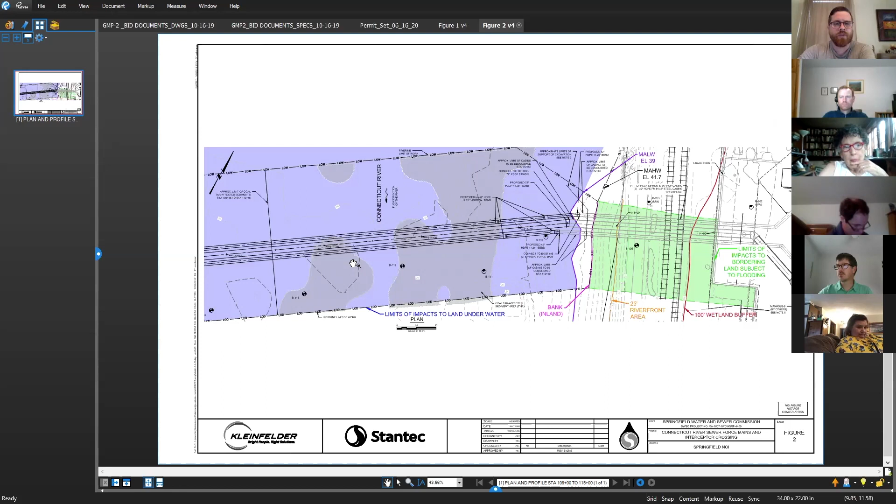So you're controlling sediment, and maybe a little bit more about that exclusion zone. I don't know if you have those figures. I'd just like a brief overview of that.

Absolutely, I'll flip back to this figure here. Apologies while this loads, it takes a little bit. Generally what's shown here—I have a whole other set of plans submitted with the NOI, they take longer to load electronically, but let me describe it. Generally, the sturgeon exclusion barrier extends to the north at a 45-degree angle to the flow, encompassing the area immediately upstream of the limit of work, so not much happens here. This is generally described as a turbidity curtain, with an opening size small enough to exclude all life stages of sturgeon and prevent their entrapment. That gets closed off, and there's a secondary turbidity curtain encompassing the entire work zone at the limit of work and downstream limit of disturbance line. That turbidity curtain will control turbidity, and within that there will be bubble curtains to control noise.

Does that address your question, Kevin, or do you want to get into the piles and other infrastructure supporting those curtains? Nope, I think I just wanted it on the record that we discussed those measures that are in place and planned for us.

Thank you. Absolutely, so there is some temporary infrastructure that needs to be put in place to support those curtains, but that is again temporary—it'll be put in place while required and removed after that portion of the work is complete.

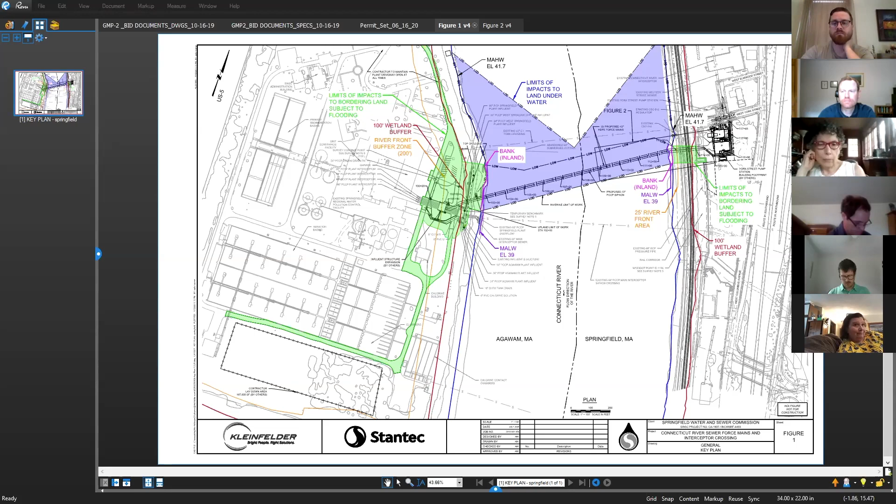If there are no other questions from the commission, I would entertain a motion to continue at the applicant's request to continue this public hearing for a minimum of 2 weeks to allow for public input, and perhaps longer for time to receive the other required permits.

And that's not my phone. Does somebody want to make that motion? I'll make a motion to continue the request for at least 2 weeks or until we receive the proper permitting. I second that. Thank you.

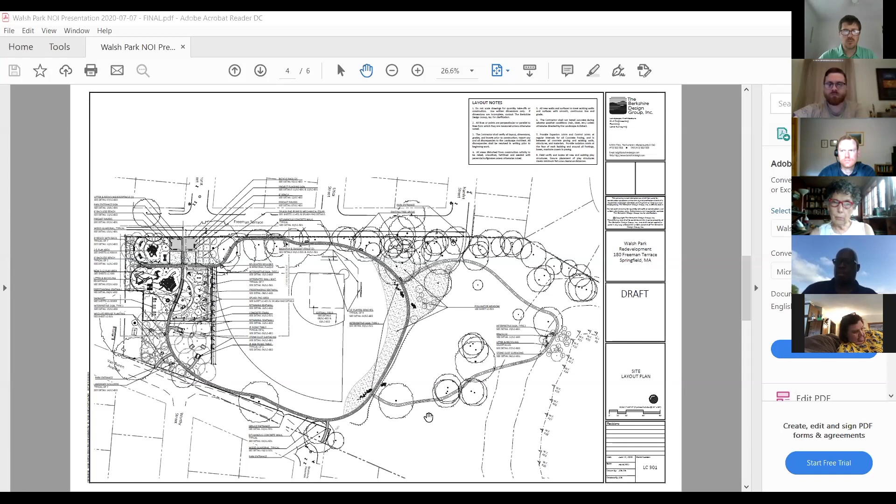And again, this southern portion of the trail is an existing trail that we're just going to improve with stone dust to make it more accessible and inviting to the public.

This is a blown up view of where that bench location is proposed. We've got some silt fence proposed at the top of the bank. This trail is existing up until where the hatched area begins, and then it's going to be a trail of similar material, just weaving its way through the trees and grade there with minimal disturbance.

And we've got some plantings, some landscape plantings being proposed as part of the interpretive signage there. Pussy willows, some other floodplain species. I think we've got a plane tree, a couple other species appropriate for floodplains, providing that opportunity for interpretive signage.

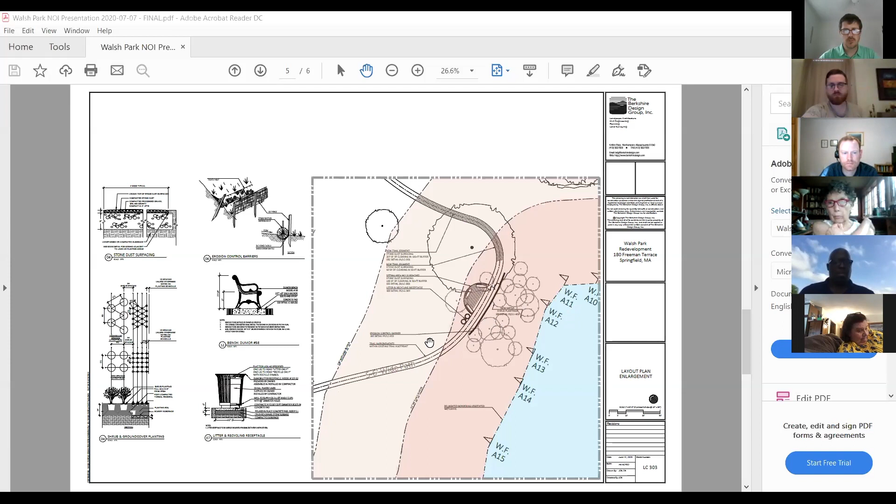It's a lot of invasive species. There's a lot of bittersweet. The forest is mostly cottonwoods. There's a number of stands of burning bush and some other invasives. So we're going to try to clean up what we can as we improve the trail, but it's really going to be about trying to minimize the disturbance through the woodland and create a different experience from the park, which is largely going to be an open field with playground structures and whatnot to the west and further away. But this was a nice way to bring in some of those elements to the larger park.

So I'd be happy to answer any questions. I don't think there's a lot proposed, but certainly appreciate you entertaining this application.

So do commission members have any questions? Now, I heard you say you're going to use stone dust. So is that basically making it pretty much handicapped accessible where it's pretty rough out there? That's the goal, is to make it handicap accessible. And how long is that trail?

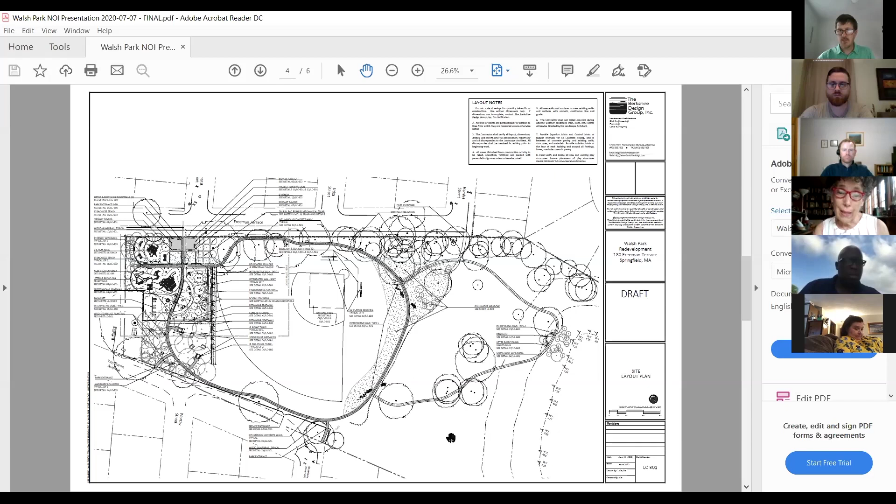Are you familiar with Regreen Springfield? I'm familiar with the name. They're working right now, and they've just gotten some grants. They're working to eradicate the knotweed through injections into the knotweed itself, which can be done in August and September. You said the report said there's quite a bit of knotweed in that area. There is quite a bit, especially at this woodland edge.

By cutting it now would be like not a good time to do it, because it'll grow even faster. But you could get in contact with them, because they're working on eradicating it in a lot of the parks in Springfield.

That's great, that's a great resource. Thank you. Do you know Dave Bloniarz? I do not. Okay, well the park department can get you his number, I'm sure. They're doing it, and he may even help absorb that into his project. But if not, he can certainly give you guidance on how to get the right material to do exactly what Juanita is speaking about. Great.

Are there any other questions from the commission? Hearing none, I would ask for a motion to continue this at the request of the applicant for a minimum of 2 weeks to allow for public input.

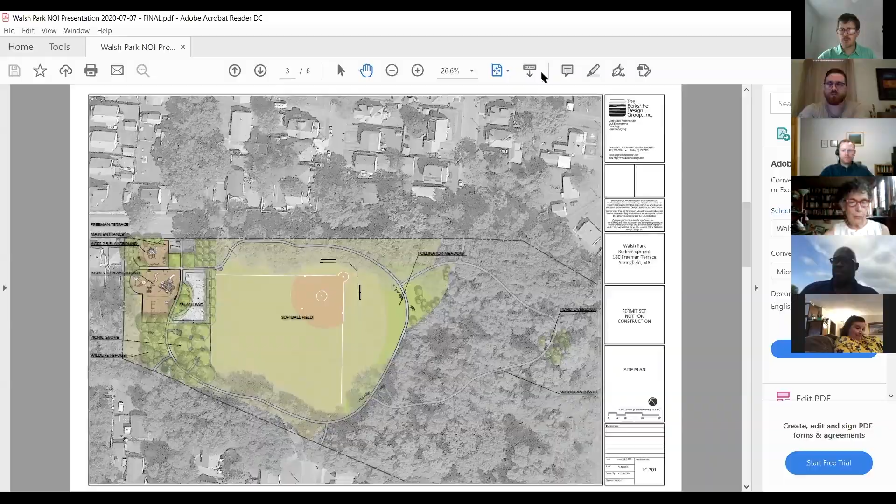That's fine. I make a motion we continue this for the 2 weeks to allow the public to make comments. Is there a second? I'll second it. Who seconded? Fred seconded. Thank you, Fred.

Having been moved and seconded, I will call for a vote. Fred? Yes. Juanita? Yes. Peter? Yes. And I'll vote yes as well. So that is continued. Thank you, gentlemen. Thank you, everyone. Have a great night.

Our third item is petition ID number 5749, an abbreviated notice of intent of a resource delineation for 1879 Allen Street. Ryan Nelson from R. Levesque Associates. We did the delineation and survey out at this property for the applicant, Mr. Charles Richard. We have submitted an ANRAD application for the approval of wetland resource areas we delineated on site.

I'm going to share my screen so you guys can see the plan. The property is located near the intersection of Cooley Street and Allen Street. It borders the Stop and Shop grocery store next door. There's two single-family homes towards the frontage on Allen Street - this one would be 1885, this one is 1879 - and then there's a parcel to the rear without an address.

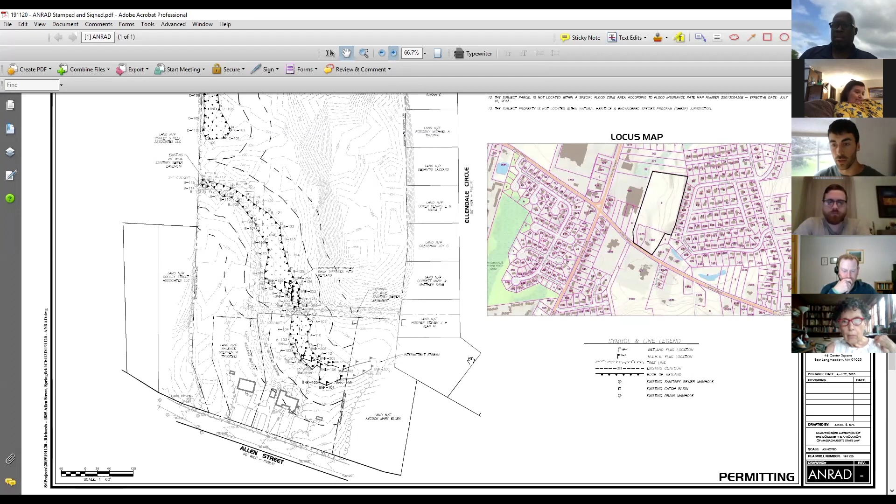There's three types of wetland resource areas delineated on site: bank of an intermittent stream, bordering vegetated wetland, as well as isolated vegetated wetlands, which are protected under Springfield's local wetland ordinance. Starting at the source of flows on the property, there's an intermittent stream that starts off-site and flows across the property. It's a fairly wide channel that is sparsely vegetated, and it was inundated at the time and flowing. Then the stream dissipates out into a bordering vegetated wetland.

It bottlenecks at a culvert over top of an existing sewer line easement. That culvert outfalls on the other side of the easement. There's a little bit of channelization going on within the wetland, and then it dissipates once again to a vegetated wetland. The flow continues down through the wetland until it is collected in a 24-inch concrete culvert that goes to what we believe is a manhole underneath the Stop and Shop parking lot. Not sure entirely where that goes, but I have a hunch it comes out at a culvert farther north on the property, and that discharges to another stream that continues off-site.

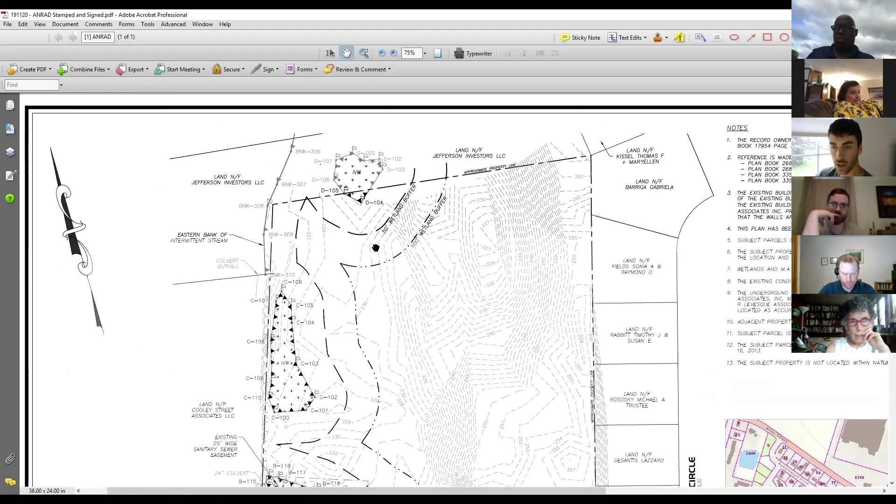Between the wetland and that culvert, there is an isolated vegetated wetland greater than 400 square feet, and there's also one that's partially located on-site and off-site at the very rear of the property. We've shown a 100-foot wetland buffer extending from the delineated boundaries. I think that covers most of the basics. Kevin and I took a look at the site today, walked all the boundaries, and it seemed to be consistent with when I was out there last delineating.

Yep, we walked the entire site. I found the flags reasonable. Actually, the isolated wetland in the middle was even a little difficult today, because there was no water in it, but you could see the topography change. When they flagged it, it was full of standing water. So I found the delineation to be reasonable. All the flags are still there. That's my only comment on this project.

Just a question - those two houses that you're talking about that are on the property, are those the two that have a for sale sign on them right now? Correct. Yes, yep, okay.

Any other commission members have questions? Yeah, I have a question - all those properties on Ellendale Circle, there aren't any houses on those, those are just properties, right? No, those are all fully developed. Yep, every one of those. I believe so, with the exception of maybe one or two at the end, but I believe they all have houses on them, yes.

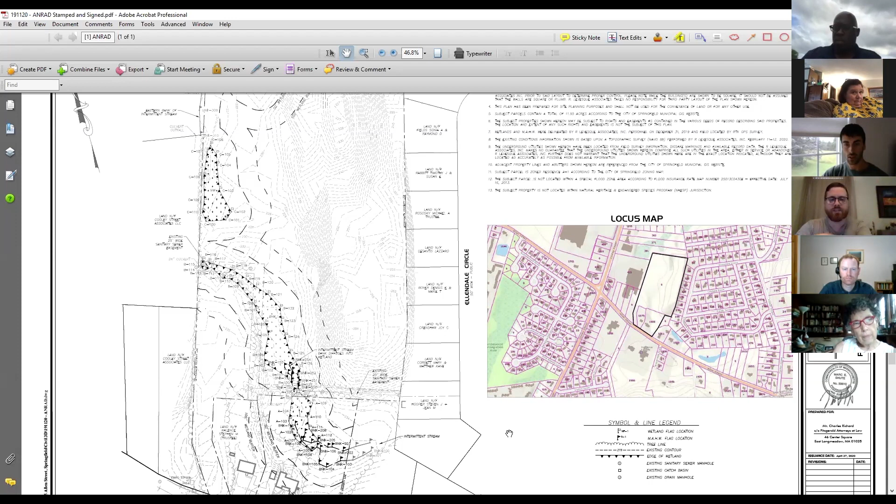Right, yep, okay. And you can see from the topo lines there - I don't know if we're looking exactly north. Oh yeah, we are generally looking north-south on this. Once you get to the east side of the buffer lines, it's just a gently sloping upland area, so there were no more lower pockets or anything like that.

Do you know what's going to happen on this piece of property, or is that something that... At this time, some sort of development, but it hasn't been decided yet. Okay.

Any other questions? I would expect, Juanita, just as a follow - once we establish the wetland border, something will come forward in the future, because they'll know that if they want to do anything, they're going to need to come to the commission. Right.

If there are no additional questions from the commission, then a motion to continue this at the request of the applicant for a minimum of 2 weeks to allow for public input would be in order.

I'll make a motion that - oh, go ahead, Peter. Go ahead. I'll make a motion to continue at the request of the applicant for a minimum of 2 weeks for public comment.

I second that, and Juanita is seconding that. Fred? Yes. Juanita? Yes. Peter? Yes. And I vote yes as well. So that's a 4-0 vote.